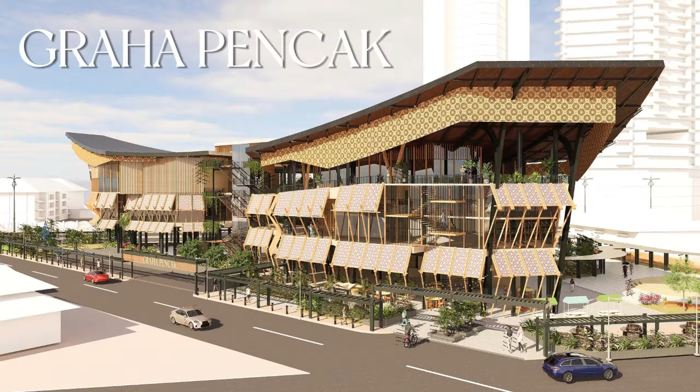Greetings, I'm Madhavan, here to present on my design proposal for the new headquarters for Perbadanan Pembangunan Kampung Baru, Graha Pencak. Kampung Baru, securely located within the center of Kuala Lumpur, is adorned with its rich culture and heritage derived from the Malay community of the area, in which Silat stands as one of the crown martial arts of the community that unites the Malay spirit during the good and tough times.

However, as modernization and the influx of a new generation into Kampung Baru, the appreciation and awareness of this martial art seems to fade away, in which time to come may cease to exist. Therefore, Graha Pencak aims to serve as the new pulse of Kampung Baru that intertwines the relationship of Silat with the people into a new working environment for the PKB.

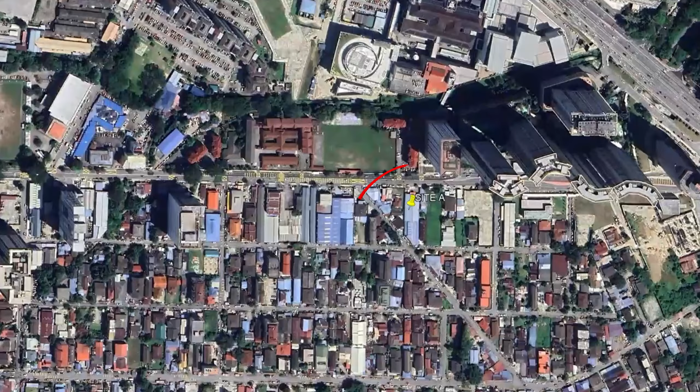As an introduction, the site selected is located along the intersection of Jalan Raja Muda Abdul Aziz and Jalan Dato' Abdul Malik. Sitting along the boundary of Kampung Baru, the site is strategically located, responding directly to the surrounding districts such as Titi Wangsa, Chow Kit, Kuala Lumpur City Centre and Kampong Datuk Keramat.

Based on the thorough site analysis, there are several weaknesses that require intervention to improve the urban prospect of Kampung Baru. Firstly, the declining appreciation to local culture caused by rapid modernization. Secondly, the lack of public gathering spaces due to compact building arrangements and lack of open fields. And thirdly, non-conducive working environments.

With the understanding of these contextual issues, a design concept has been curated, which is to adapt the essence of Silat in a way to translate its qualities into an architectural space. These qualities include harmony with nature through the infusion of natural materials and elements, community and camaraderie by evoking the sense of community through the openness and connectivity, and lastly, cultural preservation through the adaptation of Kampung Baru's multifaceted cultures into the overall programs.

Based on the given site, vehicular access had been planned by making the entrance and drop-off through Jalan Raja Muda Abdul Aziz and exit along Jalan Dato' Abdul Malik as a means to control the traffic levels. As for the pedestrians, 3 entry points have been provided to maximize the connection with the walking traffic, one of which enters along the Green Plaza to the back of the building, another along the main intersection, and a final entry point along the residential area.

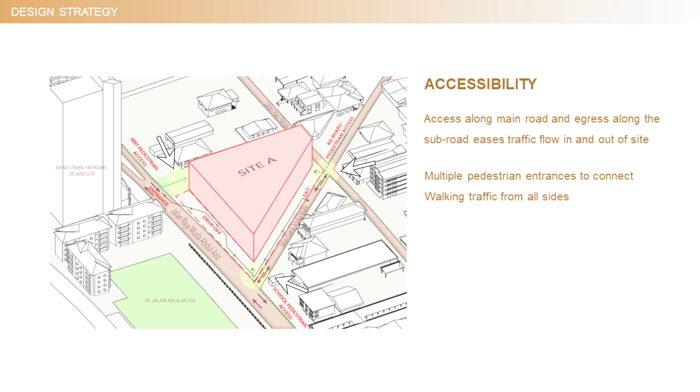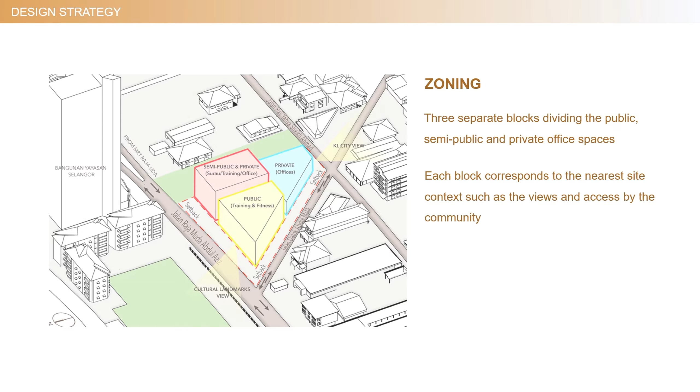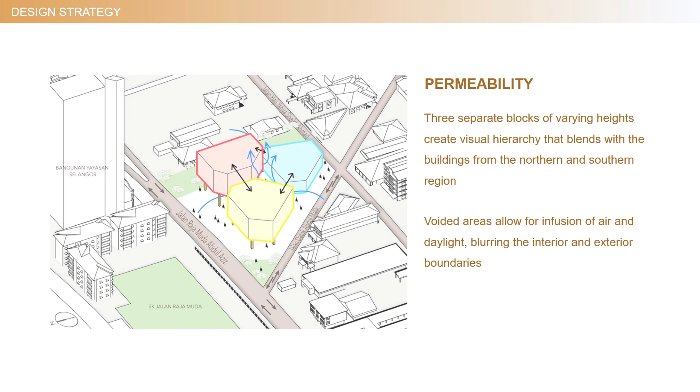The triangular site posed as a challenge to respond to all immediate contexts. Therefore, multiple frontages have been proposed in the form of 3 separate blocks as a way to benefit from the abundance of contexts within the surrounding area. And these blocks are separated into 3 functions, which include the public, semi-public and private office blocks. These 3 blocks are then elevated to different heights to respect the existing height typology of the site and provide a sense of visual hierarchy, while also opening up the ground floor and gaps between each block to allow for permeability of the people and natural elements in and out of the building.

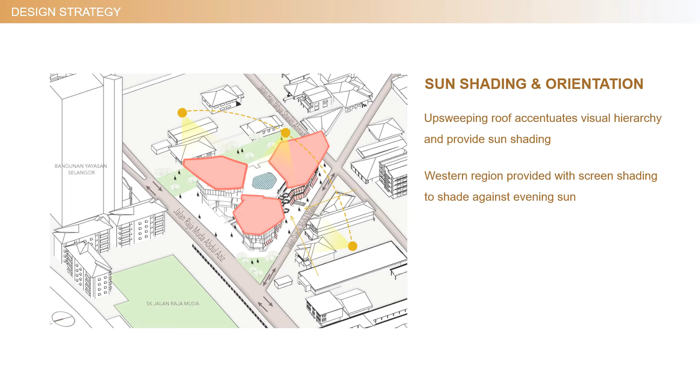And lastly, the site being mostly surrounded by low-rise buildings poses a threat from direct sunlight and heat gain. Therefore, large upsweeping roofs allow for efficient shading throughout the building, and the western region is covered by screen shadings to protect it from harsh evening sun. Together, these elements are able to form a massing that accentuates the sense of transparency and permeability while keeping the spaces well enclosed, making them functional and comfortable.

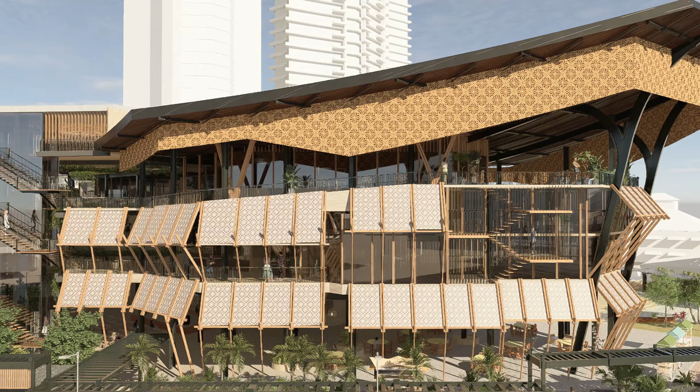Overall, the building encompasses 4 floors and 1 basement level, which are specifically dedicated for different functions and programs. The ground floor, being mostly open for pedestrian permeability, consists of a discussion lounge, a central atrium for exhibitions and public gatherings, and an eatery space which is open for local hawkers or warungs to sell their delicacies.

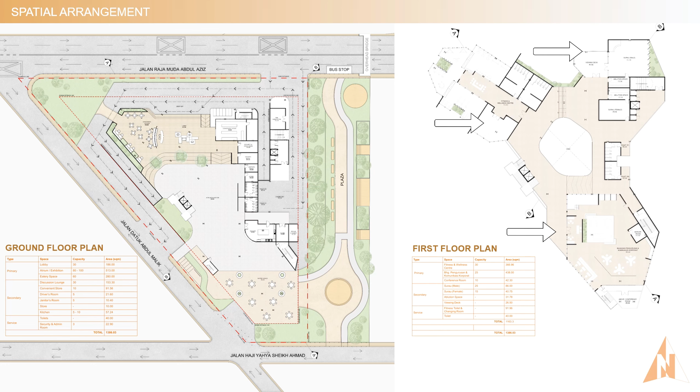As we move on to the first floor, the public block is dedicated for a fitness and wellness center open for public use, suraus, and the private block serves as the main office for the Department of Management and Corporate Communications. The office spaces are designed as an open concept to allow ease of collaboration and communication between the workers.

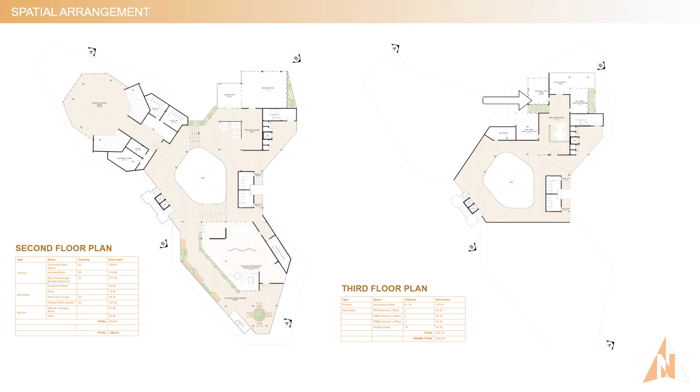On the second floor, an open concept training space is provided for Silat and other activities, a seminar room, and the main office for the Department of Town Planning and Economy. Additionally, an outdoor office garden is also designed as an informal setting to work or have discussions while enjoying the KL city views. And the third floor is dedicated specifically for the director's office, being isolated from the other offices to maintain a sense of hierarchy and privacy.

Several sustainable strategies have also been implemented to improve the building's green status, starting by maximizing the possibility of natural shading through the sloping floor arrangements. Besides that, a rainwater harvesting system is proposed by collecting water from the large roof profiles that will be used for watering the vegetation and landscaping.

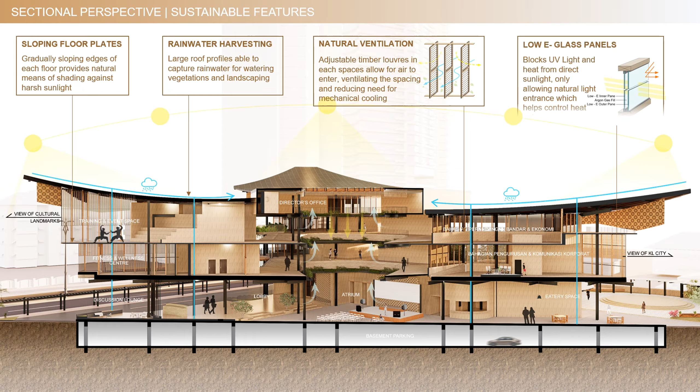As a means to utilize the natural wind flow, timber louvers and screens are added throughout the facade to control the ventilation throughout the building, maintaining an ideal temperature within the building itself. Lastly, in order to maximize transparency while controlling heat gain, low-E panels are proposed to deflect the harsh UV rays and minimize the heat gain internally.

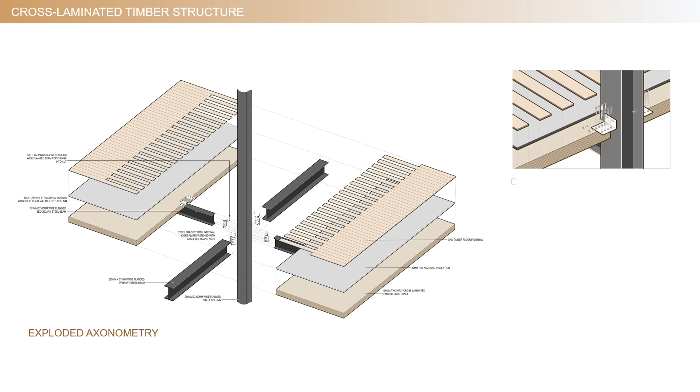The overall building maximizes the use of steel members and cross-laminated timber due to their high recyclability, which in a design perspective creates a sense of infusion between modern and traditional building elements. Now, let's open up the doors to Graha Pencak.

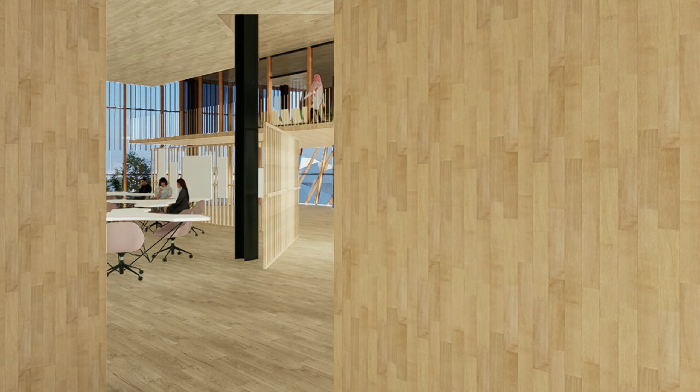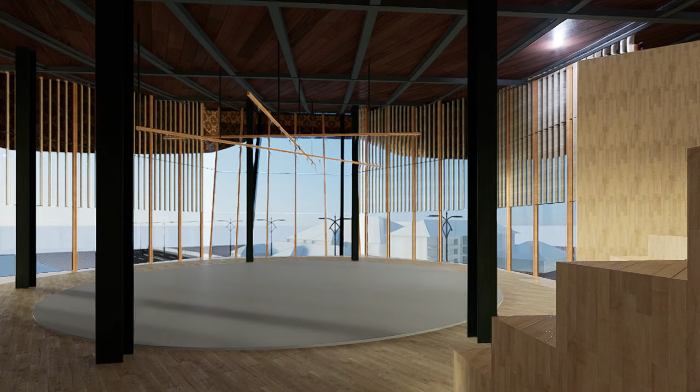Overall, Graha Pencak is the new way of life in Kampung Baru, infusing nature, openness and community spirit. It speaks as a testament towards the growth of the Kampung Baru community, which holds strong unity not only towards its people, but also a strong sense of appreciation towards its culture, the art of silat.